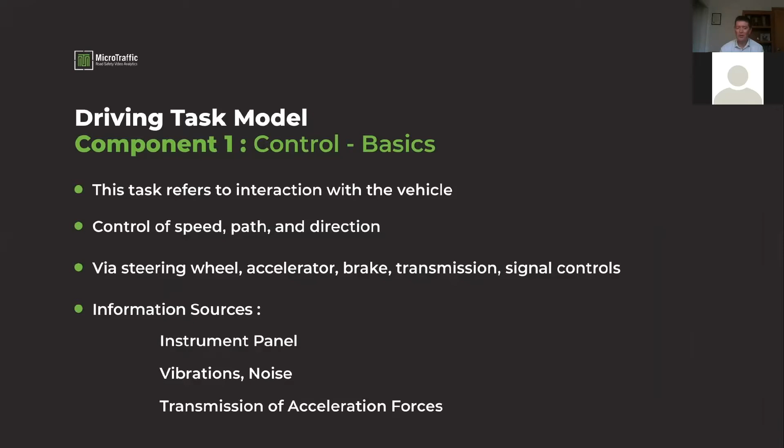And it's to stay on the path that we've selected or have previously determined in a different task that we want to do, so it's very much about execution. And we use information sources like the instrument panel, the vibrations and the feelings that we get from the vehicle in order to execute control tasks.

So for each task, and I'm not going to go into this in depth because of the time limitations on this webinar, but you could have an information prompt and then a control response. Information prompts are about hazards to the front, to the side, or things that you perceive, and then you've made a decision about what to do about it, and then that gets executed in a control task. All the control tasks are about physically manipulating the vehicle.

The second level, which is a bit more mental and less physical, is the guidance level of the driving task. This gets confusing because I'm talking about the guidance task and later talking about positive guidance and the guidance we give to a road user, two separate things, okay? When we talk about the guidance level of the task model, we're talking about the driver acting as the guide of their vehicle. And a guide decides the course, the path, the speed, where to go next, for hazard avoidance, for staying on alignment, and these kinds of things.

So it refers to the ongoing selection of safe speed and path, but it's pretty much an immediate selection. It's not talking about the whole trip level guidance. It means like now and the immediate next few parts of the trip.

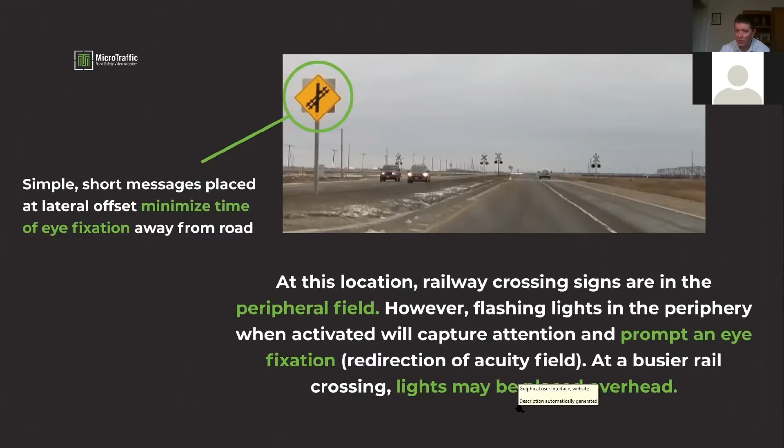When signs are outside of the field of visual acuity, the brightness and simplicity of the sign help us turn our attention quickly to comprehend it. So you have a short symbol with a lower lateral offset. The goal is to minimize the time of eye fixation away from the road, so drivers can get that field of visual acuity back in front of them, which is the natural position for responding to alignment information and traffic information, the two most important things drivers need for executing their control tasks.

The last quick thing I want to talk about is contrast sensitivity and eye adjustment. You see two vehicles here: the first has high contrast with its surroundings and is easy to detect. There's a vehicle behind it that's dark in a dark location, harder to detect because of the lower contrast. Contrast is the difference in luminance between an object and its surroundings. When that difference is very small, it's hard to pick up the object; when it's high, it's easy to pick up.

When contrast is high in our peripheral vision, it's a trigger that maybe something is important, and we'll allocate an eye fixation, turning our head or eyes to look at what caught our attention. When contrast is low, we may not even notice it's there in our periphery, and if we don't notice it, we're certainly not going to allocate an eye fixation to it. Drivers can make up to 4 eye fixations per second at peak performance, but can't sustain that for long—the sustained rate is 1 to 2 fixations per second.

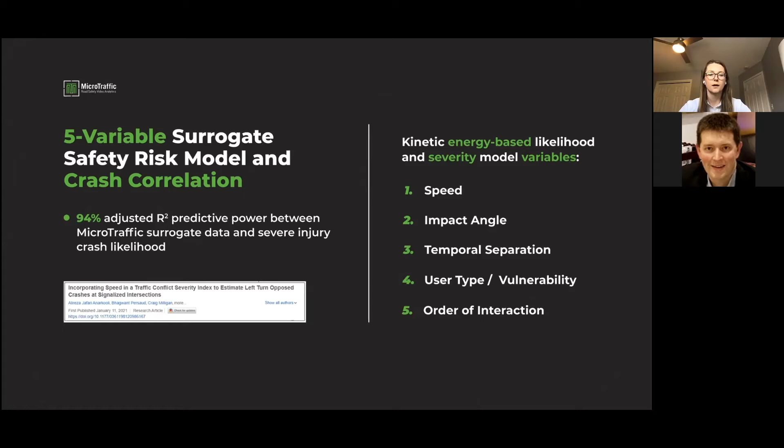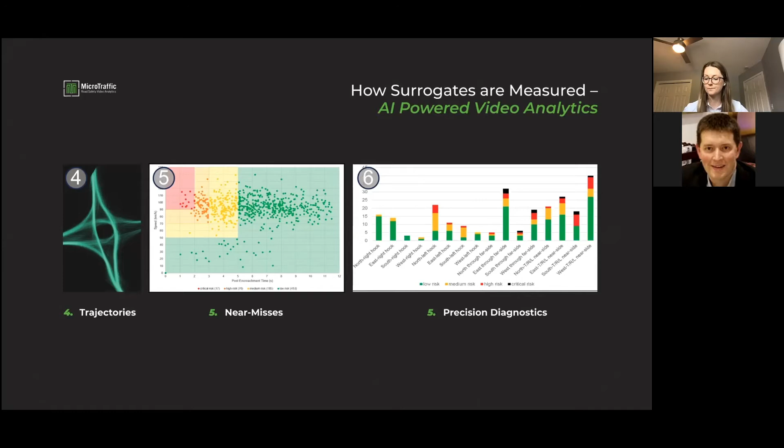There are 16 different configurations for vulnerable road users shown in slide 6, and we also look at vehicle-vehicle interactions. So that was a quick overview of surrogate safety, an example of what near misses look like, and how we compute that using artificial intelligence.

I want to touch now on rapid before and after assessments and why this is valuable. A lot of times we rely on crash data to evaluate the impacts of safety improvements, but we generally have to wait a minimum of 3 years, and preferably at least 5, to have sufficient crash data for a full assessment of safety trends.

However, with conflict data, we can get a large enough sample size in a relatively short period of time that we can start to assess safety performance within 1 month. These rapid before and after assessments really enable agencies to trial new low-cost treatments, understand how established treatments are working within their jurisdiction, and provide justification for larger improvement investments.

The first example I want to share is a rural highway example in British Columbia, Canada, a very mountainous region. What we looked at here is the configuration of a minor road stop control across a major highway.

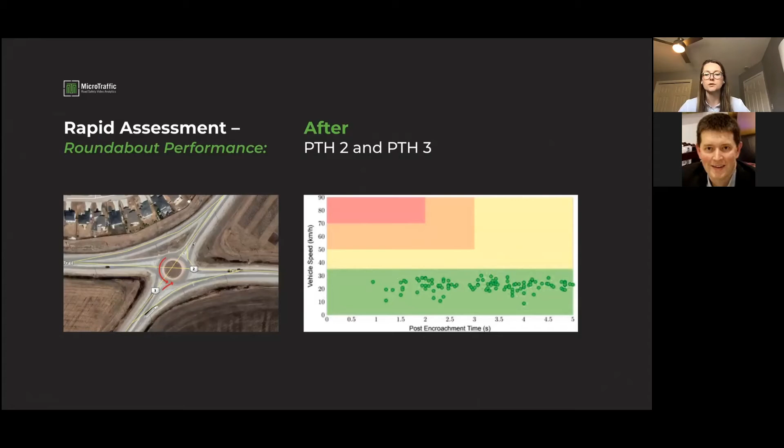To summarize today, I outlined a bit about what surrogate safety metrics are and how they can be used to complete rapid assessments of intersection safety performance. So without being reactive and waiting for collisions to occur to assess if we've addressed that risk, we can be proactive and go out right away and determine what kind of risk was reduced and how much risk remains.

These rapid assessments are really helpful for improving our understanding of the impact of low-cost treatments within your agency, as well as the remaining risk, and also for providing quantitative justification for road safety improvement investments, such as a roundabout. Thank you so much for listening to this portion.

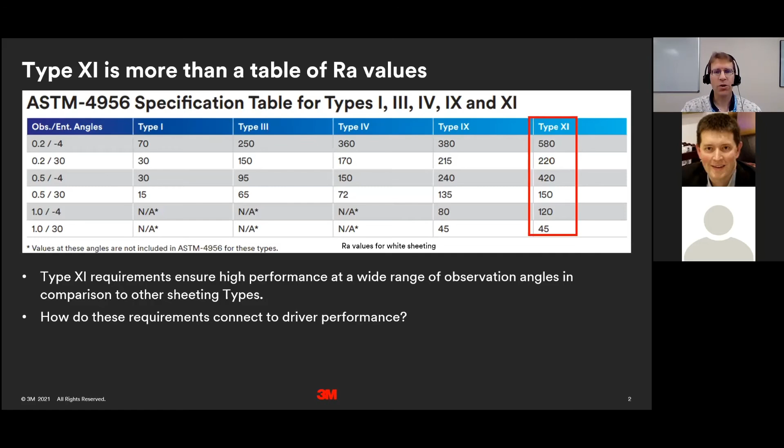One of the things we then need to do is consider how those requirements, how that performance of the sign sheeting, connects to driver performance—the kinds of things Craig described in his opening section. So in order to do that, we'll go back and look at some of the historical, older technology, the lower type numbers, and see how those behave.

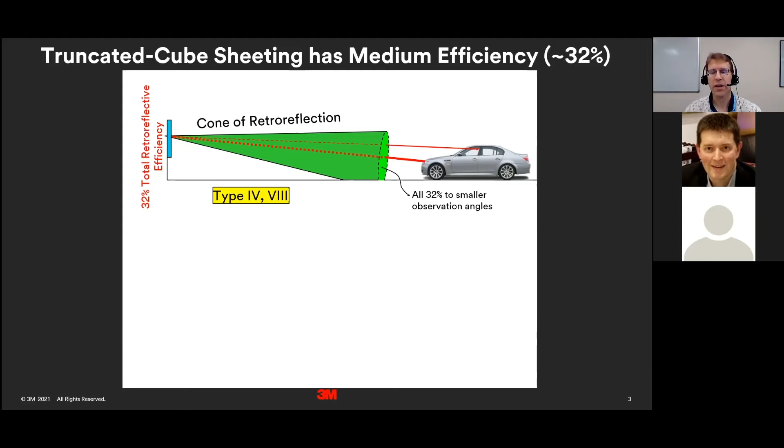That cone, that divergence profile—the spreading of the light—is designed to send light back to passenger vehicles. That's fine for someone in a smaller vehicle, but as soon as you shift to a larger vehicle, those types of products tend not to distribute light very effectively to a large truck. The driver of a large truck is going to receive very little light, and that's a problem.

Over the historical development of sheeting, as described in the ASTM standard, there was a type introduced—type 9—which took that same approximately 30% efficiency and chose to expand the cone of retroreflectivity, to broaden it, so that some light would be directed to drivers of large vehicles.

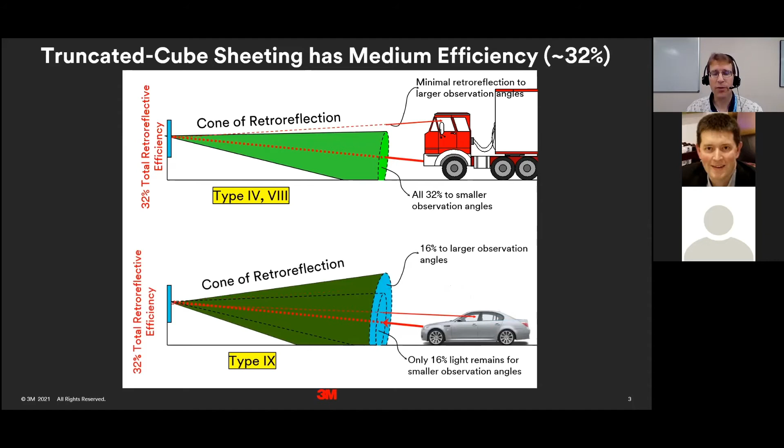And so that helps, but then the result of that is that a significantly smaller fraction of light is available to drivers of smaller vehicles. And so that represents a compromise that the truncated cube sheeting is faced with. There's this choice between, with the limited amount of light available, where is it going to be distributed? Which vehicles are going to be served? And how is that all going to work?

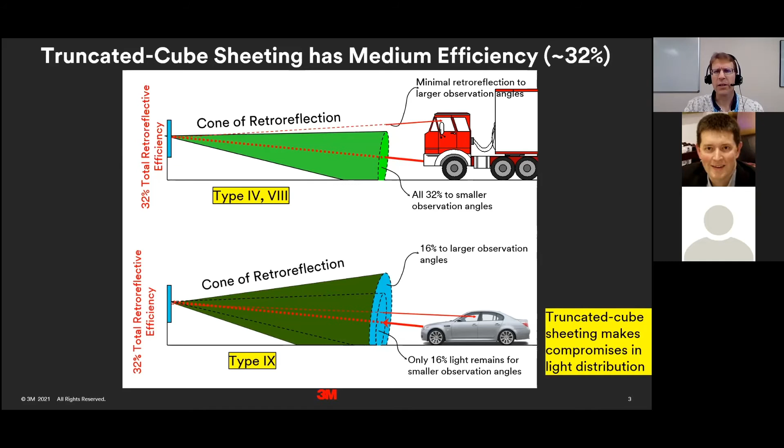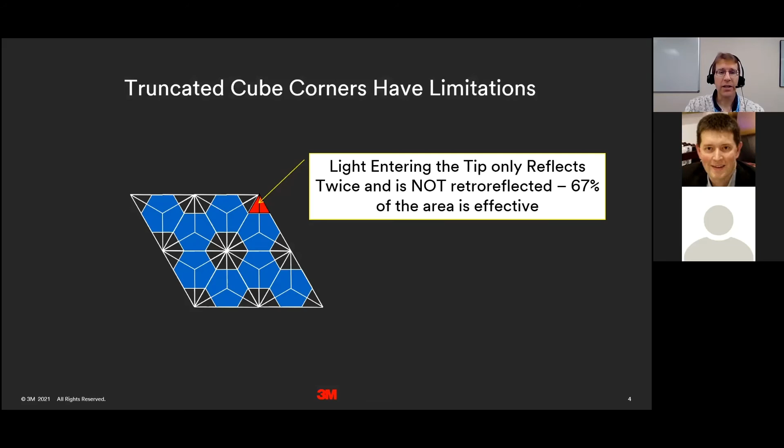And so that means that only about 2/3 of the area of the cube corner is effective, is optically active. That's shown by superimposing these blue regions. So within each one of those cube corners, when light strikes within that blue hexagonal region, it retroreflects. If it strikes outside of there in the tips, it does not. And so what we then could imagine doing is thinking carefully and saying, well, why, with this truncated cube corner where we have these dead regions, these regions that are non-functional, what would happen if we didn't actually make those?

And then once this is translated into actual sheeting, there are reflection losses getting the light in and out of the sheeting, and some other characteristics of the way the sheeting is constructed results in nearly 60% efficiency in the 3M DG cubed full cube type 11 sheeting product.

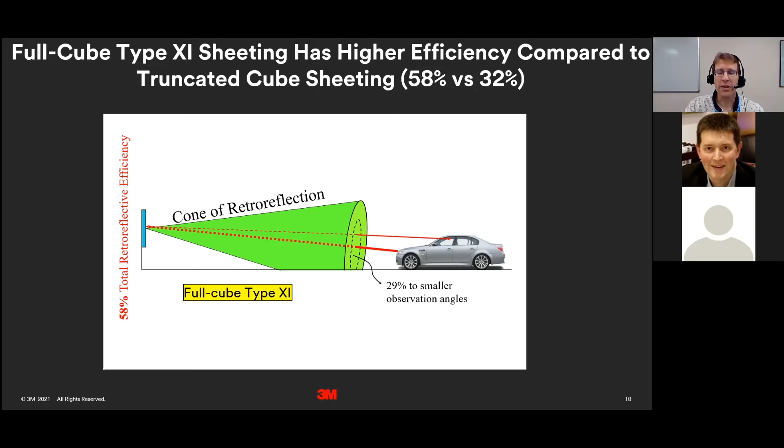And so if we go back to what we looked at before with how the sheeting interacts with the driver, now if we take this nearly 60% in the type 11 sheeting, and we can have a broad cone of retroreflection, like we described before with the type 9 sheeting, but we can distribute a substantially greater portion to both drivers of smaller vehicles as well as drivers of larger vehicles. So this way we're able to remove some of that compromise that's present with truncated cube sheeting by being able to serve drivers of multiple vehicle sizes and then multiple geometries, going back to the variety of different sign locations that Craig mentioned in some of his comments.

So this sort of description and this understanding of type 11 sheeting may be some things that some of you may be very familiar with through your past exposure to the ASTM sheeting types. But I wanted to also bring into our discussion today some current research that's been done that helps us to understand some of the real value of the type 11 sheeting.

And the first one is looking at headlight distributions. In particular, over the passage of time, the distribution profiles of vehicle headlamps continue to change. The University of Michigan Transportation Research Institute, UMTRI, that some folks may have heard of, has, over the course of the past decades, occasionally published studies of headlamp output, where they will sample and generate market-weighted averages of the headlamps in vehicles that are being sold in a given year. And so just recently in 2019, they published the latest version of this study.

This allows us to go back and compare to the prior study that they did, which was 8 years before that, in 2011. And so then this is an output on the top showing as a function of angle, both vertical angle and horizontal angle, the output from the headlamps. And then you see superimposed on top of those some theoretical sign locations, a left shoulder, an overhead, and a right shoulder sign location.

As you can imagine, as the vehicle is traveling towards the sign, it would actually be moving in the distribution space, so that when the vehicle is very far from the sign it would be located in the center, and as the vehicle drives toward the sign, it would move outward in angle space.

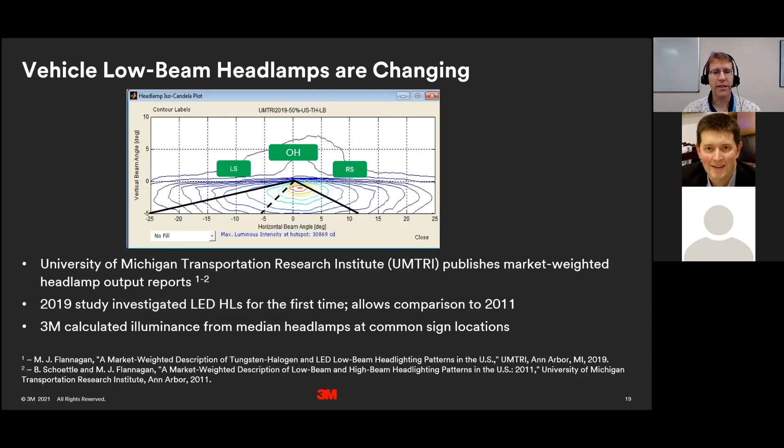So what we did at 3M is we took these distribution profiles for these headlamps and calculated the illuminance, the amount of light that is striking a sign at some of these characteristic locations, using the new 2019 headlamp data as compared to the 2011 data. And we found some interesting things.

So as we see these 10 to 15 to 20% reductions in illuminance on the sign, that means that sign with the same sheeting it currently has now appears 10 to 20% less bright than it did before. So in order to preserve the brightness of the sign with these more modern headlamps delivering less light, the effectiveness of high performance sheeting such as Type 11 sheeting becomes increasingly important.

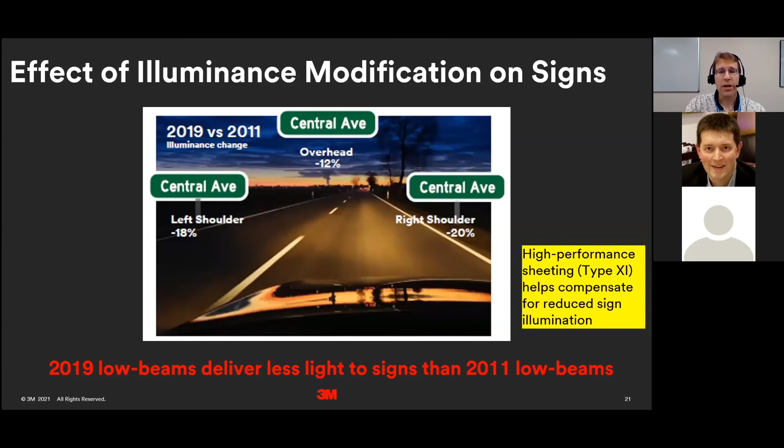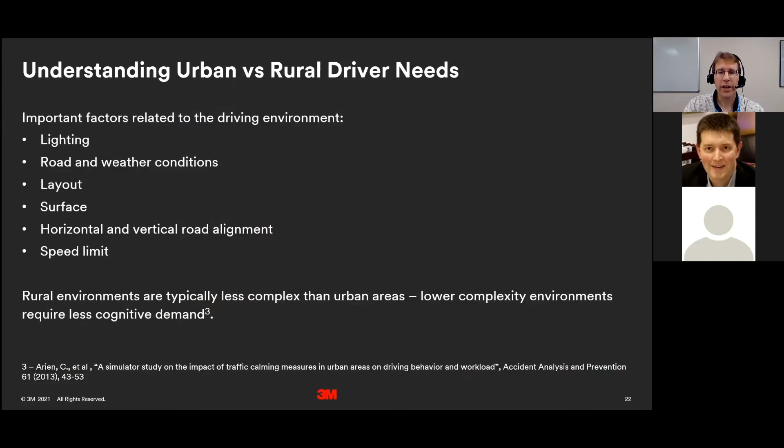So that's one component. And then the other is starting to look at some of the driver needs. Craig did a great job of describing the driving task and many of the things drivers need to be concerned about. But there was a study done that helps us understand how signs are viewed based on the complexity of the surrounding area.

In particular, when we look at urban versus rural driving, as we move from rural areas into urban areas, the background complexity, the amount of distraction, the amount of other objects within the viewing field, draw the driver's attention away from signs. So there is an increased need for luminance of signs, particularly with the presence of glare sources and other things. The amount of luminance the sign needs to be generating in order for drivers to accurately read the sign and get the information it's conveying needs to approximately double.